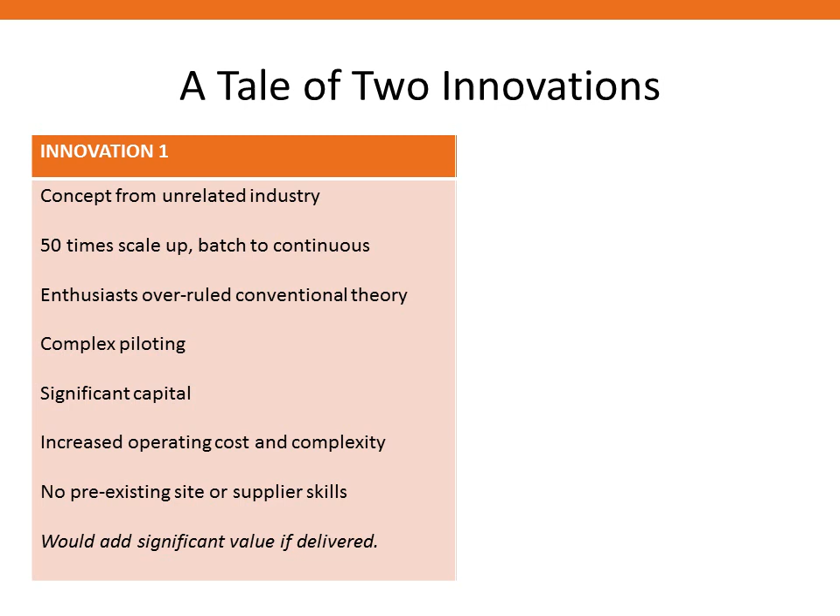So I think you can see it's pretty obvious which one succeeded and which one didn't, or sorry, which one didn't take off. There's the first one that took off. Now, that might not be what we all think to start with. And I'll explain those two innovations. The first one, the one that came from manufacturing, small scale paint or chocolate grinding into zinc grinding, was the IsaMill. The second one was mine to mill.

Now, the way we applied it at Mount Isa was more, I guess, geomet. It was matching mineralogy and mining, design, plant schedules with ore types and metallurgy. But at the same time it was being applied on a lot of other sites for mill throughput. Now, this is a bit of an overreach, I know. Mine to mill didn't die, it has been successful, it continued. And it's something that Walter Valery keeps reminding me, that a lot of sites continued with mine to mill.

But I guess my point was, it didn't at Mount Isa. After a few years it was forgotten, it was lost. Some of the other sites, the poster sites that adopted it, let it go. Highland Valley were one, they're rediscovering it now. Other sites did discover it. But the thing is, really, it was free money. It was saying you don't have to spend anything on your site, or very little, and you can make more money. You would have thought that everyone would have taken up free money.

So yes, some people did. They kept the flame burning, the candle was still there, and now it is taking off again. The interesting thing is, though, why wasn't it adopted much more widely during the 1990s and 2000s? And so I use these two examples to highlight two of the points I'm going to conclude with at the end. First of all, for an innovation to really take root, the operators desperately need it.

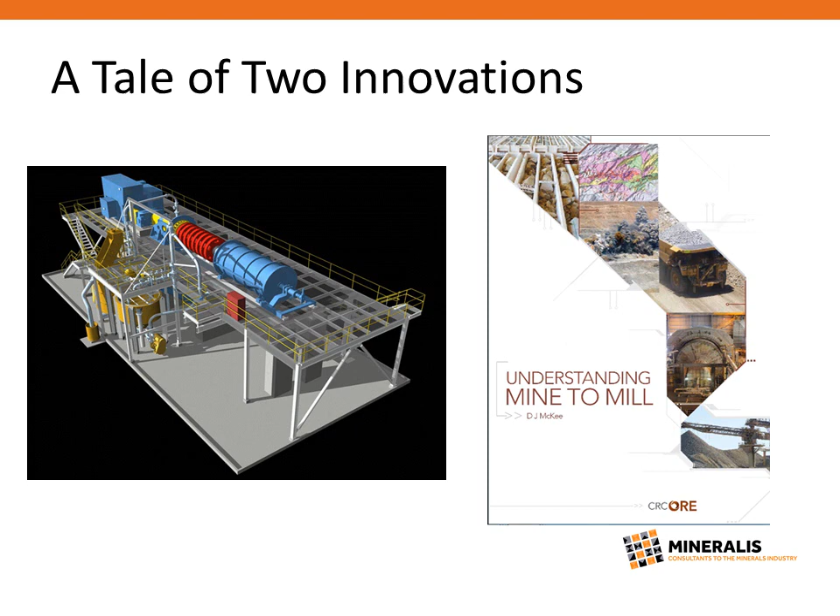And there was innovation that sort of broke one of the other rules. If possible, when you develop an innovation, try not to cross organisational barriers, or organisational boundaries, because that greatly increases the complexity. Or if you do, then you have to make sure you change the organisational systems to suit the innovation.

So, the innovation valley of death. I'm sure everyone has seen the typical technology adoption curve drawn as an S-shaped curve. In fact, it isn't quite S-shaped. Well, it is, but there's a discontinuity somewhere around here. After the first inventor and the early enthusiasts adopted, there's a discontinuity where it isn't sure whether that technology will follow this path to widespread adoption, or if it will maybe not die, but just become a curiosity, a niche technology at a couple of sites, gradually fading away.

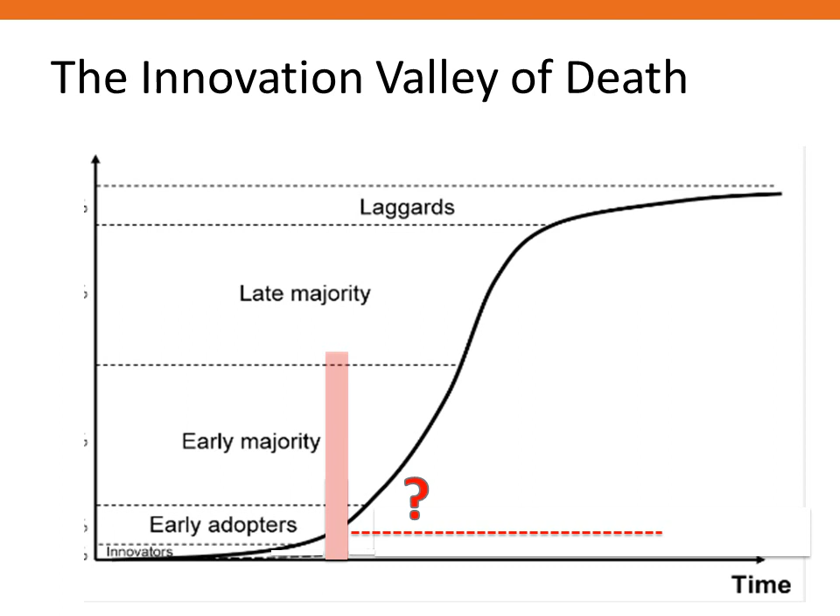And the simple way I use to explain this curve is on this side of this discontinuity, the people at most companies are worried, if I buy this technology, I might get sacked if it doesn't work. On this side of the curve, they're saying, if I don't buy this technology, I might get sacked. So how do we get across that valley of death?

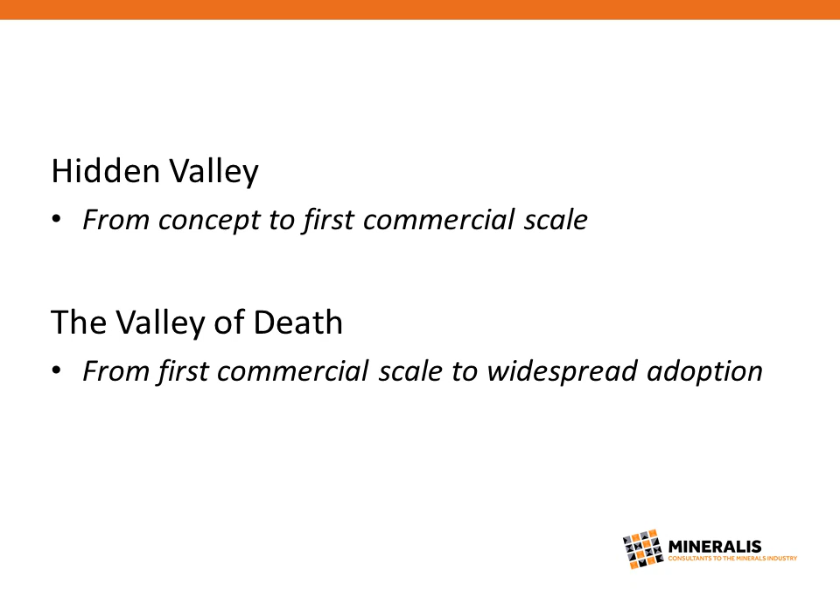Well, actually, it isn't as simple as that, because before you even get to that valley of death, you've got to get across the hidden valley, which is getting from the first concept of the technology to your first installation. So that adoption curve you saw is after the first successful commercial installation. Then you're ready to go across the valley of death.

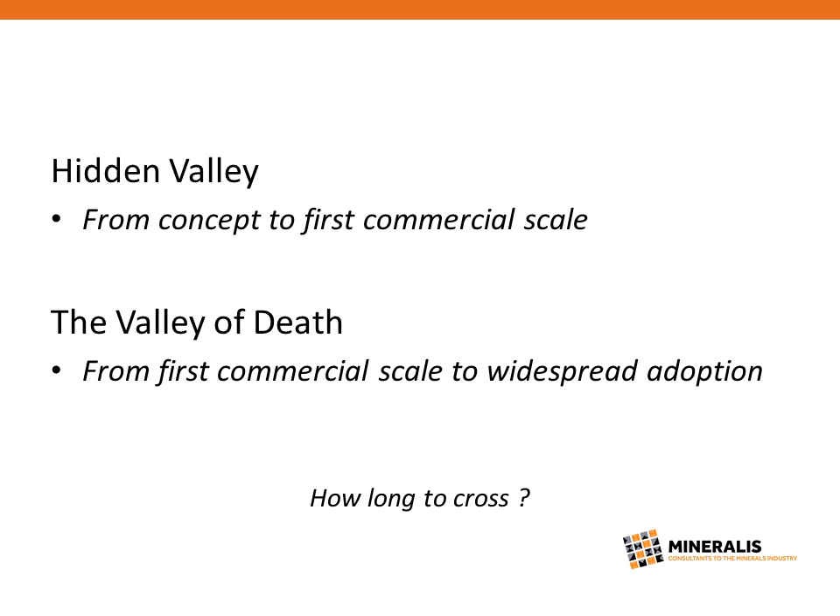So, does anyone have any feelings, how long do you think it takes to get through either one or both of those valleys? 5 years? Each, or? Well, I always think of 10 years as being the minimum to go from your idea to start to pay your money back. Yeah, okay. So Philip, 10 years from concept to pay your money back. So we'll come back to that.

So I'm going to go through a couple of examples from my experience. So the IsaSmelt technology, and some of you may have seen a presentation by Chris Fountain here last year, I think, which had some of this detail in. Now, to be fair, IsaSmelt is a very complex technology. It's not a single bit of gear, it's a whole smelting technology. So it's more complex than the majority. But that started the concept.

Well, I'm not sure when John Floyd first thought of it, but the lance was really demonstrated in 1973. And then we went through a series of smelting tests for Mount Isa, bench scale tests, and then a series of pilot plant tests to demonstrate in the operation, until about 20 years after the concept, the first full-scale installation at Mount Isa, or large-scale commercial production plant.

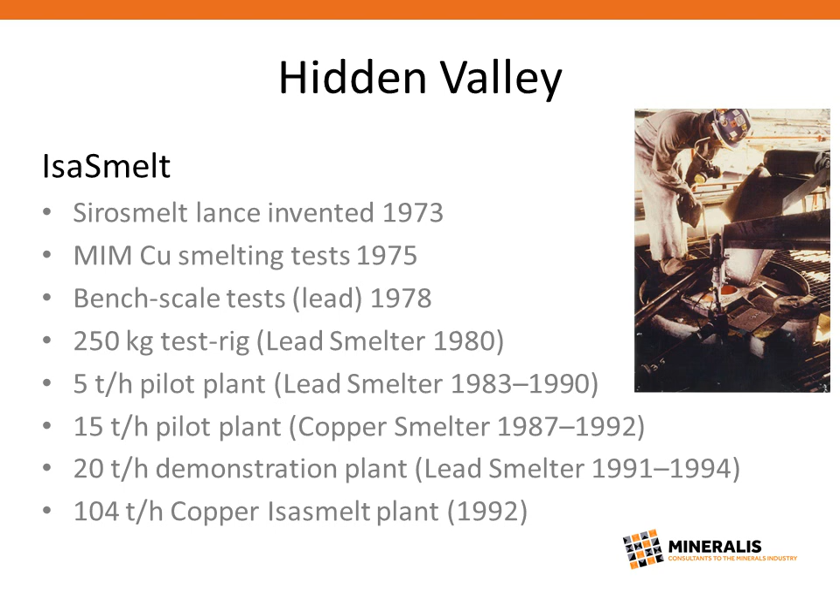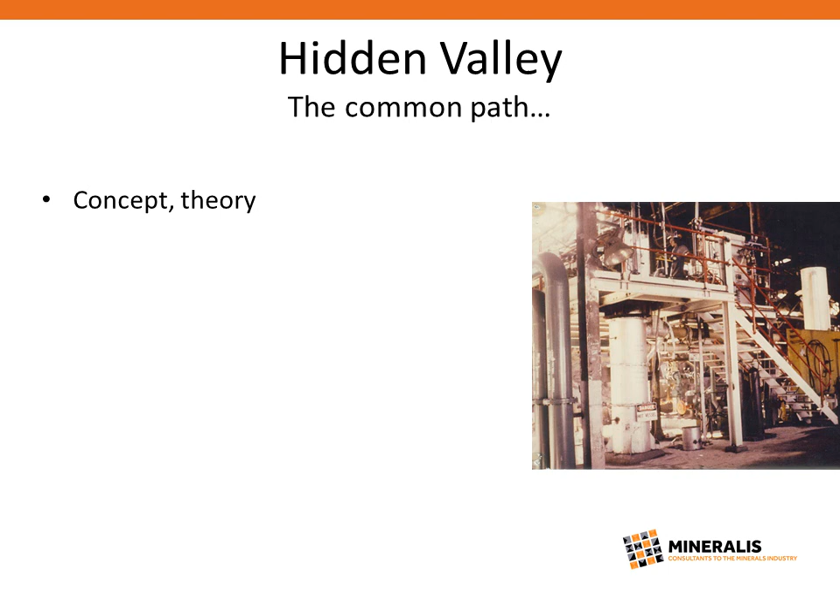And indeed, although IsaSmelt's complex and it was a 20-year journey across the hidden valley, the path was common. Starting with the concept and the theory, you need some sort of proof at the bench scale. And then the path we took at Mount Isa, and I really think it's not the only path but it's close to it, you have to demonstrate it in a plant, the one that's going to adopt it. As we know, scale up is difficult. You can't go from a small scale to large scale in one step. You need several steps. And that costs a lot of money. That needs a lot of funding.

And so the logic that we applied was that's only going to happen if each scale-up step is embedded in production, and that the operators, the maintenance people, the engineers, the researchers, the technologists absolutely have to work together to make it work. And each of those plants becomes a part of the production budget, so it has to work. And if it does work, it pays its capital back and it justifies the next stage of scale-up.

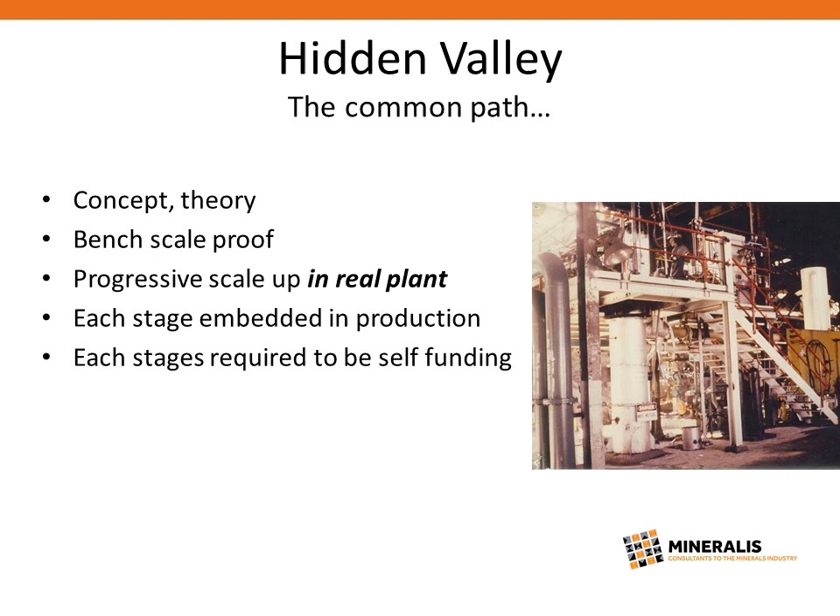So each stage was designed so that the 5 tonne an hour, okay, if it works, it's going to make this much extra lead per year, that will pay back for the plant. And when it's running, we now know how to build the 10 tonne per hour plant. And when that's running, then we know how to build the 20 tonne per hour plant. And at each stage, we solve the scale-up problem progressively.

But that takes millions of dollars of capital. But it's staged, because you only risk the next stage. If it doesn't work in the plant, if you can't make your budget, you've only lost that stage, not the full step.

And that gets you to the first commercial stage installation. As I said, in the case of Isasmelt, it was about 20 years. For the other technologies, IsaMill was a lot less than that, because it's not a whole plant operation. It's almost a point solution within the plant.

But that's not the end of it, because once you've built that plant, that's when you find your final level of problems, of issues. Things that probably aren't visible at the small scale, or at the intermediate scales, but when you're in full-scale production and your whole production relies on it, that's when you really find out about the little niggling operating issues, the niggling maintenance issues that really will determine whether this technology is going to be successful. And that's when you solve those fine details.

So really, even at this stage, you still only have the beta model. And you can rush to market faster than that if you want. And you might like to ask Samsung how that worked for them, their latest phone. So depending on the technology, for Isasmelt, it's a 20-year journey. For others, I'd say it's maybe 5 if it's relatively simple, but somewhere between 5 and 10 to get through each of those stages.

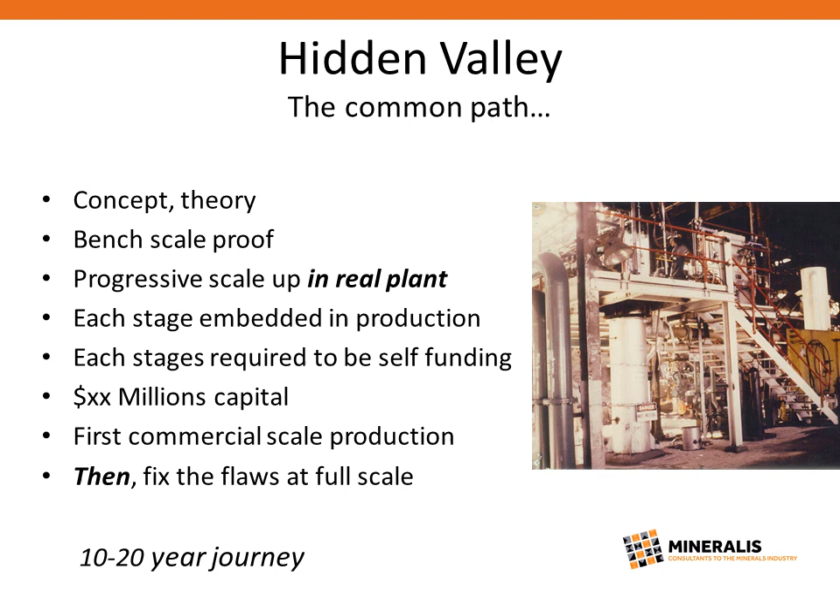So after all that work, we cross the Hidden Valley, and that's when it really gets hard. Because now, the people we're trying to market to, they're not our own company. They're not enthusiasts about our technology. They're not in love with their technology. They just want to do something for their plant. They don't care about how elegant it is. They say, what does it do for me?

And then you're starting to deal with competitors who have a vested interest in it failing. And they play hard. They really want it to fail, and they'll do their best to help it fail, and they'll spread any little bit of information or misinformation they can to try to make sure it doesn't cross that valley of death, because that hurts them if it does.

So, I'm not sure if any of you have read this book, but I strongly recommend it. A lot of people talk about disruptive technologies, and perhaps Christensen wasn't the first person to use that term, but he explains it very well, and explains how technologies can disrupt an entire industry, and how very well-established companies can lose their business because they didn't see a threat coming from a new technology that did cross the valley of death and caught them by surprise.

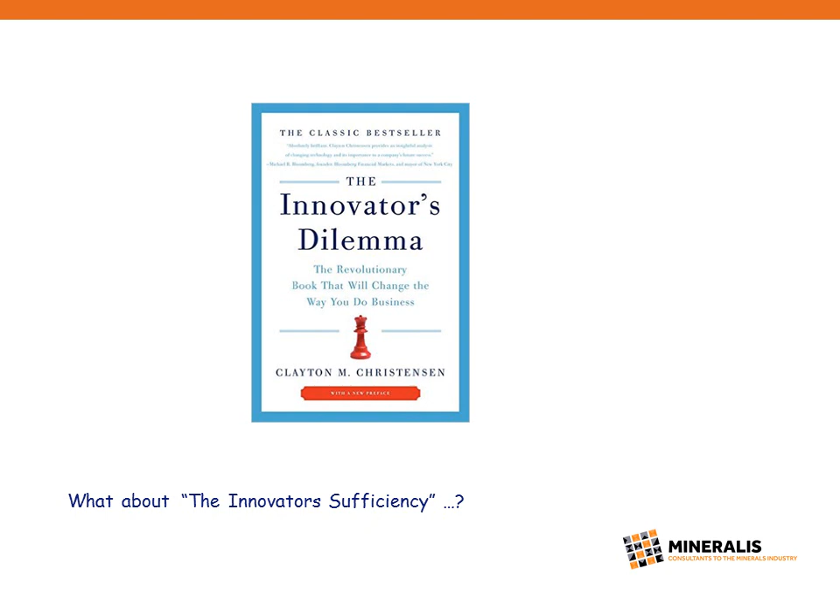So I'll just tell some stories, and actually probably Philip would be able to tell some of these stories because he personally experienced it. But the Jameson cell had a similar development, scale up from concept, different stages of plant evolution, plant demonstration. And we thought we did everything right. We had a really good installation in a lead zinc concentrator that worked very well.

In hindsight, MIM went to market a little bit too early because the installation we had worked really well, but it turned out it was within a high circulating load and had a very steady feed. And the cell at that stage hadn't really been developed as far as we needed to. It was like a sports car that was very good on a flat road, but it wasn't good for crossing a riverbed, which is what operations are. And so when it got to some more difficult operations, those flaws showed up for the first time.

And so MIM sold some early cells to Kidd Creek in Canada and installed them in Alabama. And there's nothing wrong with them, they just weren't robust enough yet for that application. We hadn't learned how to make them deal with varying feed. And we hadn't learned how to integrate them in the best way with conventional cells. We sort of thought these are better than cells, so they're the solution.

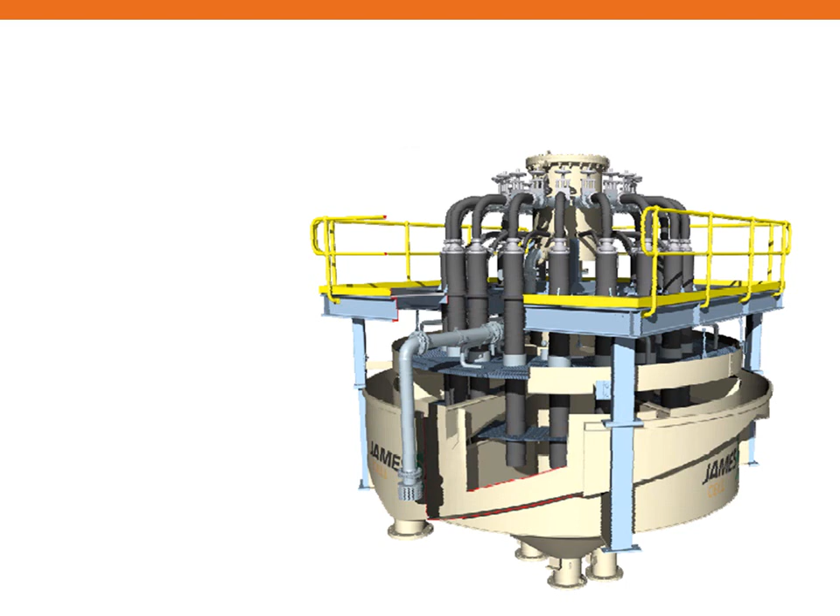Similar story on IsaSmelt, and again this is from Chris Fountain's presentation, but it wasn't until we got to full scale that we really understood the refractory life issues. From the pilot plant work, it didn't show up. Even at the size below, before the final scale up to full size, we're getting 2 years refractory life. That was okay. But for the first 6 campaigns in IsaSmelt, we averaged about a year life.

Now, a shutdown of a smelter is a real pain. You lose production for about a month. It's a major job. You've got a high cost, take out all the old bricks, put new bricks in, cool the furnace down, reheat it. It's a major disruption. And frankly, 1 year refractory life is not a viable product. It was still good technology. It just wasn't good enough.

And it took us 7 years to learn all the little tricks about temperature control and lance control and brick type and slag type. A whole lot of tricks had to be put together to work out, if we put all that together, we can get 3 or 4 year refractory life. And I don't know how we would have done that in less than 7 years, which is what it took. And I guess a bit of luck here again, we hadn't sold too many smelters in that 7 years, so we didn't get such a bad reputation. By the time the technology was really taken up, we had the solution for long refractory life from our own operations.

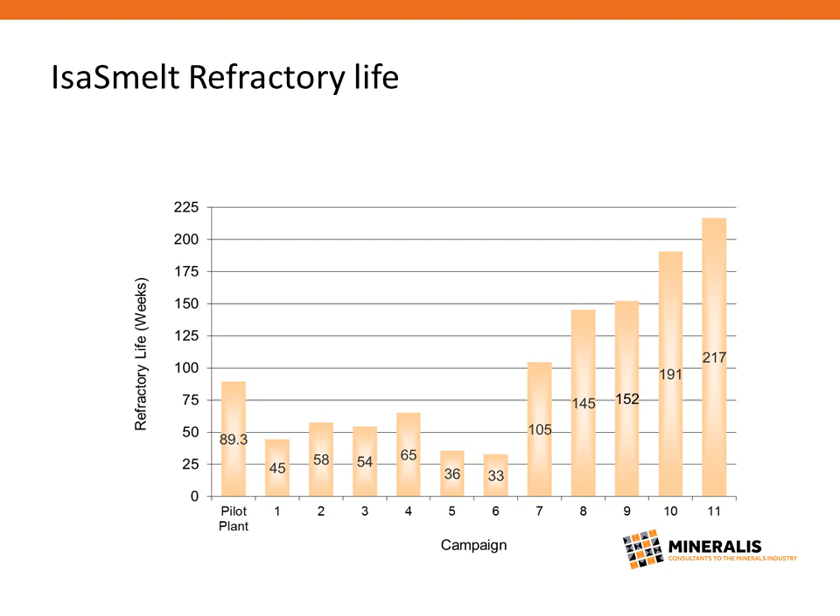And so the IsaSmelt adoption, this is the first plant at Mount Isa. From there, I guess you could say the valley of death is somewhere around here, so somewhere around 12 to 13 years, where we can safely say we're there now. People are buying this, they're referring it. We're happy to send people to some of the overseas installations to get references. So in that case, 20 years development from concept, and then another 13 years over the innovation valley of death.

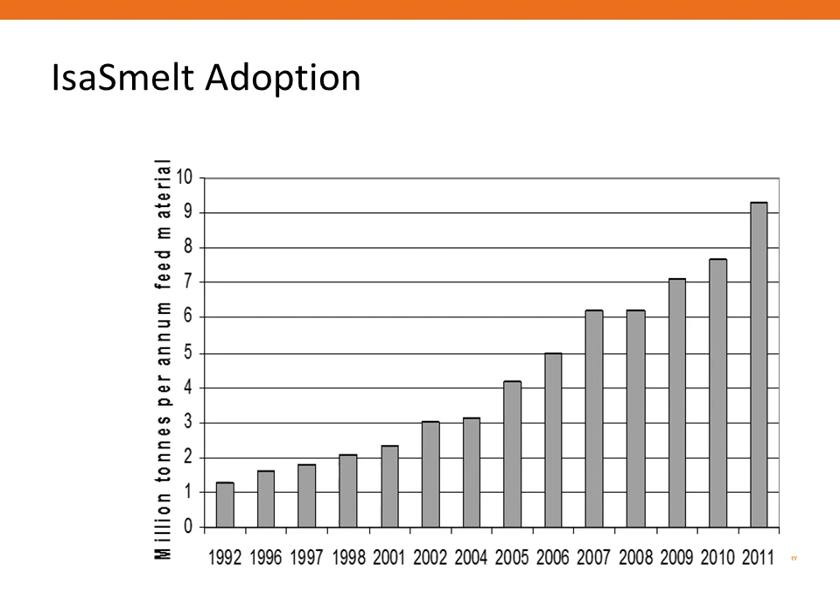In the case of IsaMill, from concept to the first commercial scale was a bit faster. As I said, it's a relatively simpler technology. A pilot plant mill is not that big. It can be stored at a part of the plant, not the whole plant. But again, the first large-scale installation in 94, it's somewhere around here, probably 2007, 2008, you could say, we're over that valley of death. And bear in mind, these first installations were largely internal, so we didn't have to convince external customers, we didn't have to fight off competitors. These people were enthusiasts and they knew what they needed. So it was somewhere around here, again, 12, 15 years.

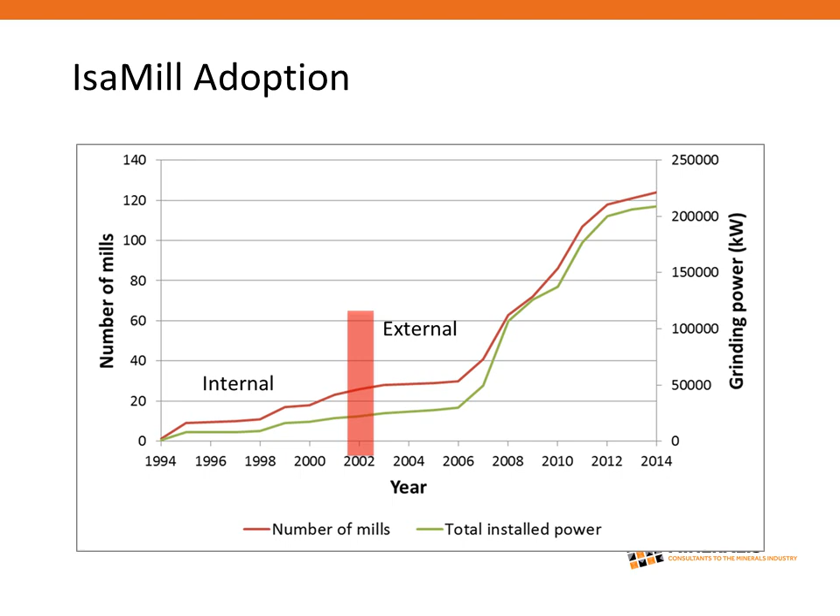Operations are highly complex, interrelated beasts. All these moving parts are connected. You make one change somewhere, it has another change somewhere you never even anticipated, somewhere else in the operation. And so the trouble is, if you're selling a point solution, rarely does a point solution work. And that's what I said about the first Jameson cells. If we didn't understand how it interacts with the other flotation cells, then we don't have a full solution yet. We've got a point solution, but the sites need an integrated solution, not a point solution.

So again, when people say the mining industry is conservative, I think, well, maybe you don't understand their business enough, because I don't think they're conservative at all. I think the mining industry is bold. And so it has a right to be cautious about what it does.

When you look at a mining operation, maybe nowadays a $5 billion investment in a country where you're not sure what the government's going to be in 10 years' time when you start up, you're not sure what the environmental legislation is going to be, you're not even really sure whether your product in 10 years' time is still going to be environmentally favoured or disfavoured. You can't move the asset. The only possible application is on that ore body where you've just sunk the money.

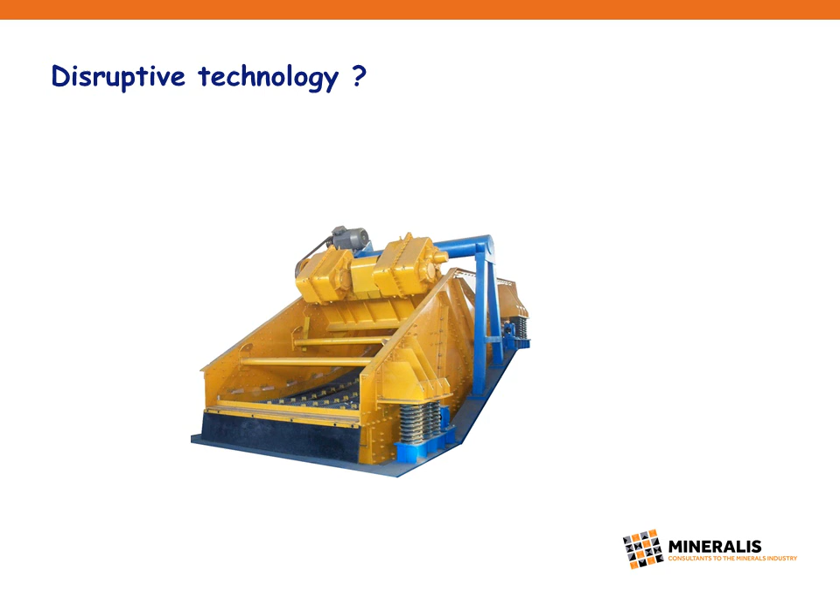So that's why we have to understand what drives operators day to day. How do they get through their job day to day, and how do we help them? So a couple of things really only dawned on me later in life. We always say the mining industry is a small industry. It really is a small industry.

compared with manufacturing. People say mining should be like manufacturing, and I think that misses the point. Yes, we know that. We've known that for 50 years. We should be more like manufacturing. But there are real reasons why mining is different. One of them is that every ore body is different, and it is relatively small, and there are no major system integrators that are happy to go to a site and say, look, we have a solution, buy our solution for your factory, and this will work. We just program it for you.

And even if there were, as someone said, they've probably only got 5 customers in the world, unlike manufacturing. So the KPMGs or Pricewaterhouses don't develop those sort of large-scale integrated solutions for mining because there's only a couple of customers.

And point solutions aren't enough. And I've given some examples of that; you have to consider the whole system context. How does it affect everything in the system? How does it affect the tailings, the water quality, the upstream equipment, the downstream equipment, the circulating loads? If you don't understand that, it might look as though it's going to work, but it won't work properly or well when it goes into the plant.

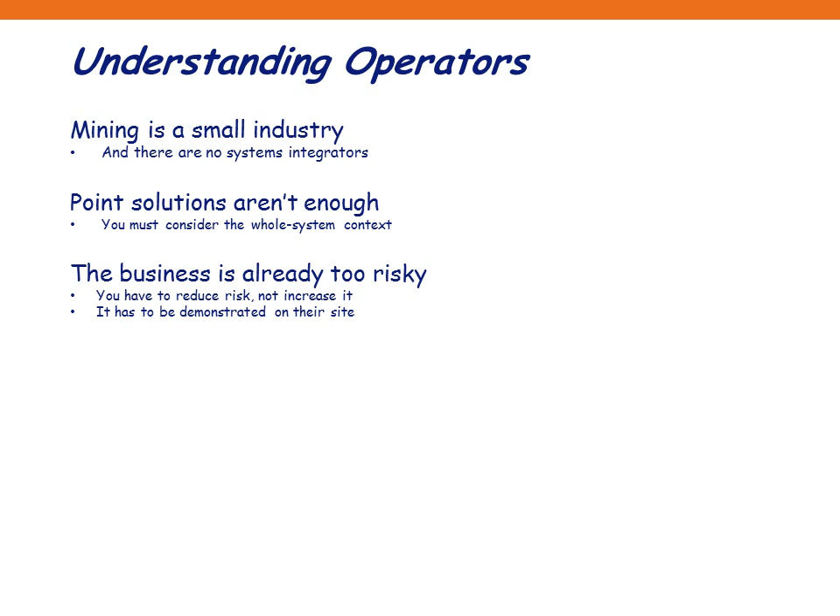As you said, the business is already too risky, so don't add risk, remove risk. And I do believe the only way to do that is it has to be demonstrated in someone's own plant. That also gives you the chance to show how it interacts with their own equipment. So when people say, you know, we'll demonstrate it at the pilot plant or somewhere else, another plant, that won't get you very far at all. You have to, I believe almost every time, show someone in their site how that's going to work for them, how it works in their unique situation.

Even simple changes are disruptive, like the screen. So that means you have to look for things that are necessary for the site. Yeah, people are really busy. They've got so many priorities. In fact, they don't have time to do any more work. If there's more work to be done, it's going to be done out of hours and on the weekend. And they're only going to do that if it's really necessary.

And if possible, it's much, much easier if you can make those installations incremental to production rather than part of the whole production stream. So as soon as you put someone's entire production stream at threat, like a screen, interrupting the feed to put over a screen, that's interrupting the whole production flow. If you could do that on a small scale screen, if that site happened to have 5 production lines and you're able to do it on one of them, you've got a chance.

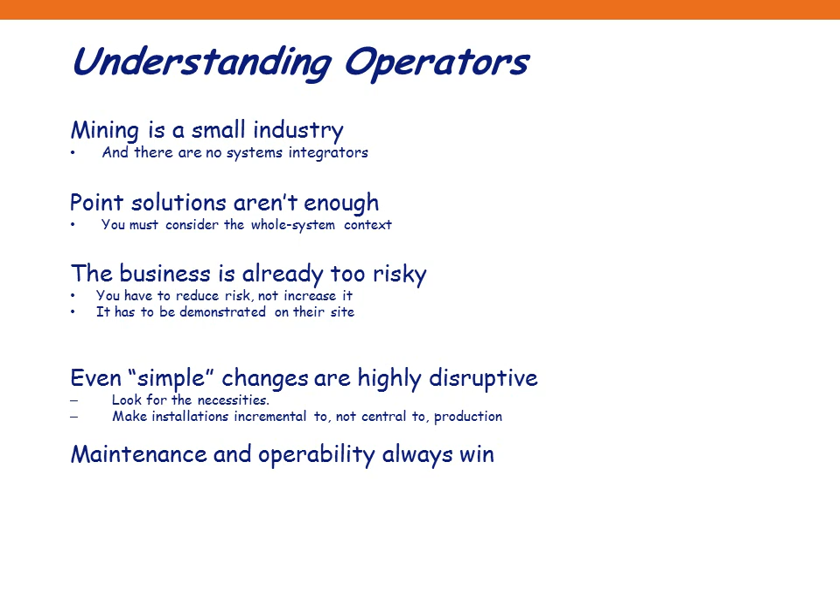And in the end, how hard it is to maintain and how hard it is to operate will always win. If you put it in a couple of sites and it's just a maintenance nightmare or an operating nightmare, people won't like it and they won't give it good references. And people's KPIs will also win too.

Now that's why I believe Mine to Mill didn't, in those days, cross the valley of death, because in the end, the blasting engineers' KPIs and the mining engineers' KPIs and the metallurgists' KPIs were not aligned for Mine to Mill. In spite of the KPIs, we made it work, but as soon as it was no longer necessary, it shrunk back to what it had been before. So if you can, avoid crossing organisational boundaries. It's not always possible.

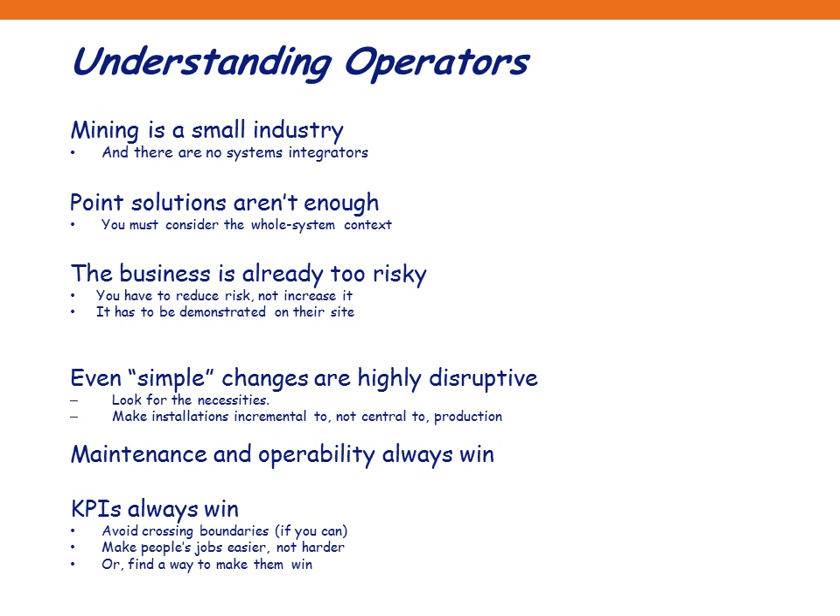But whatever you do, try to make someone's job easier, not harder. It's already too hard. They just want someone to help them get through their day and meet their targets. And if you can, find a way to make people win. Make it their idea, give them the credit for it, find out what it is that motivates them or that has to get them through their day, and try to make them successful.

So, go back to the IsaMill example. I said that took about 13 years to cross the valley of death. And when I think about it, we had a following wind. We had a lot of help. To start with, we had a critical mass of technology people, and we had a supportive management over a decade or so that allowed us to research, invest in the technology, demonstrate at the plant. We had some large-scale early users at Isa and McArthur River. Those sites, because they're internal users, were able to take risks. We were able to demonstrate equipment, wear parts, improve designs.

We had an established high-quality manufacturer in Netzsch. They'd been in the fine grinding business for about 50 to 100 years before we even developed the IsaMill. Our company let us market it, and that's quite unusual. Most companies, BHPs, Rios, would not allow internal technology to be marketed, let alone support it and welcome visitors to the site. We had a compelling case history at Mount Isa.

If anyone saw Tim Napier-Munn's talk the other week, we had a plot of the mineralogy over the years, the decline, what happened when we did different steps, including the IsaMill. We had a marketing team that had all come out of the technology. They understood it. They understood how to apply it.

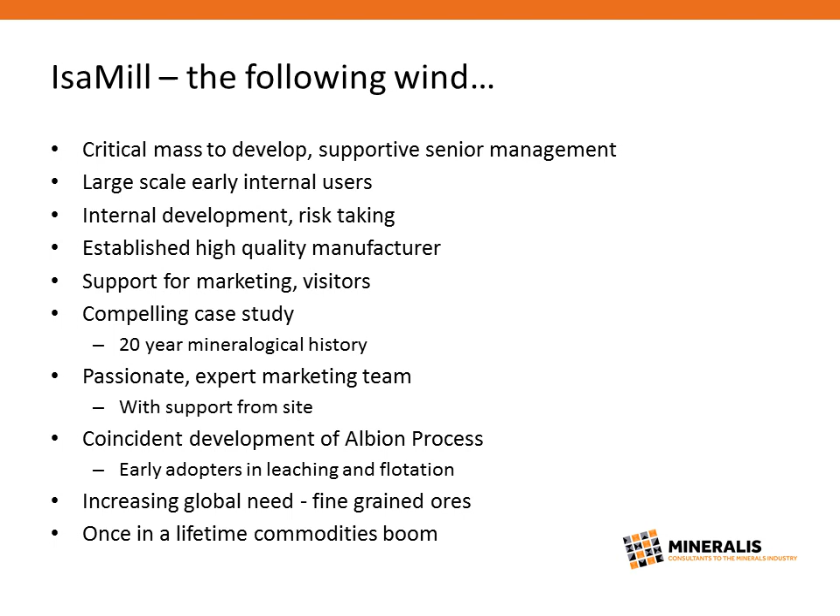At that time, it was the right technology for the right time. Ores are getting finer grained and needed finer grinding. And finally, to really put the cream on the cake, we were marketing it in a once-in-a-lifetime commodities boom. We had great timing. So, with all that, it still took us about 13 years to get across the valley of death.

I hear people now say, "Oh, well, if we just worked harder, if we just work like manufacturing, we cross it in 5 years." Now, I'm not talking for software or services. I'm talking equipment, major equipment changes. So I think Daryl Hannigan would have the answer better than I would. Honestly, you're dreaming.

Okay, to sum everything up, from my experience, I've thought of 7 necessary conditions to successfully innovate. I said the driving need. People are too busy. The old saying, necessity is the mother of invention. It absolutely has to be necessary. If it's just an improvement, it's not good enough. People don't have time to do it.

It's got to be designed for your ore. No one cares. And that was one of the mistakes we made early on. We told people about these wonderful things we did at Mount Isa, really thinking they care. They don't care what it did for us. They want to know what's it going to do for me. And the only way to do that is to do the work on their ore in their plant.

Obviously, you need passionate champions. The bite-sized implementation, so that goes back to the screen example. If you can, don't disrupt the whole feed. Take a small portion of the feed out, or find a stream where you can apply it, demonstrate it without disrupting production. As soon as you disrupt production, you're in a whole new world of pain in terms of getting approval.